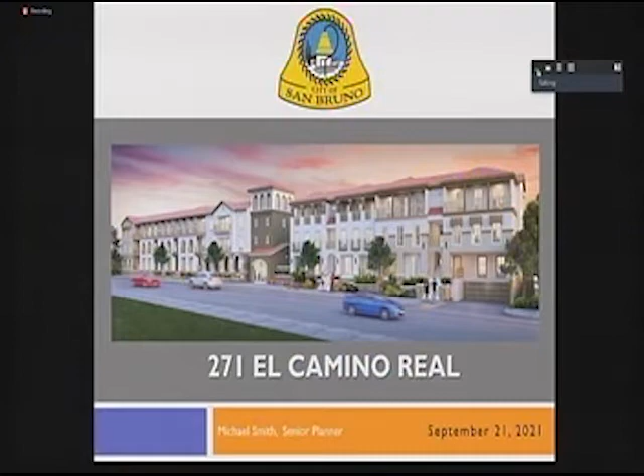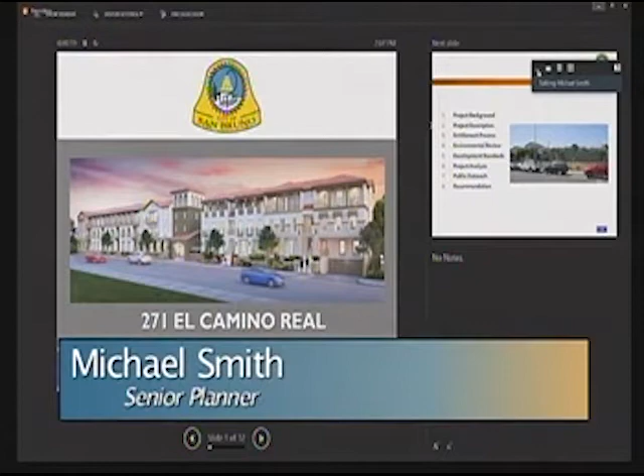The project before you is 271 El Camino Real, located on the west side between Crystal Springs Road and San Felipe Avenue. The site is approximately 0.57 acres, comprised of 6 contiguous parcels. While most of the project site fronts on El Camino Real, it includes a narrow parcel with frontage on Linden Avenue at the rear to the west. The site is presently vacant and fenced off, formerly occupied by a restaurant, an attached single-family dwelling, and a surface parking lot, all demolished in 2015. There are 10 mature trees, including 5 heritage trees, and a number of shrubs present. Surrounding land uses include single-family and multifamily residential in all directions, and various commercial businesses along El Camino Real.

The project site has a general plan land use designation of multi-use with a residential focus and is zoned MXR, multi-use with a residential focus. Please note this is part of the rezoning efforts from April of this year.

So that's a little bit of the project background. I'm going to go into the project description, cover the entitlement process, touch on the environmental review, the development standards for the site, give you a project analysis, cover the public outreach that was done, and wrap up with the staff recommendation.

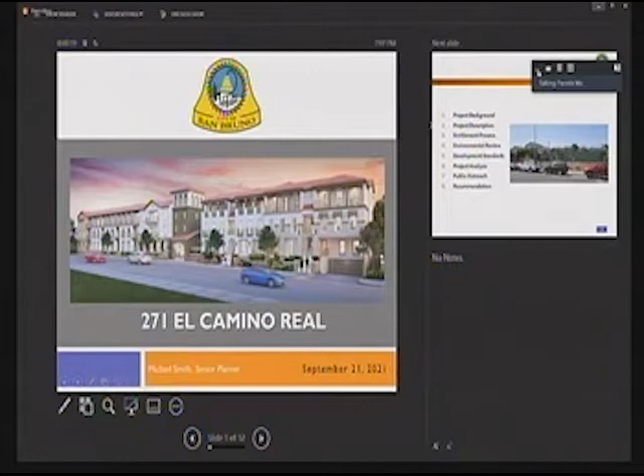Michael, can I pause you? We're not seeing your slide moving, you're still on the cover slide, and there are actually 32 slides. You may have to reshare your screen. I'm going to forego that for right now since I've spoken with the project architect and he's done a really good slideshow of the project. I'm having trouble toggling back and forth between the two and the staff report, so I'm just going to stick to the presentation portion.

So where I left off, the height of the building is 48 feet 2 inches, with apartments on the southern section and townhouses on the northern section. There's approximately 4,955 square feet of common lobby space within the complex, including all the walkways. In total there will be 13 two-bedroom units and 10 three-bedroom units, for a total of 23 units. Vehicle access would be provided via a new right turn in and right turn out driveway on El Camino Real at the northern corner of the project site.

The driveway would connect to a 50 space below grade parking garage of approximately 17,752 square feet, providing 4 guest spaces and 46 residential spaces, including 2 electrical vehicle spaces, 3 ADA spaces, and 1 motorcycle parking space. The garage would be equipped with 12 car lifts handling 24 parking spaces. 6 short-term bicycle parking spaces would be provided adjacent to the ground floor lobby, and 6 long-term spaces in the subsurface garage.

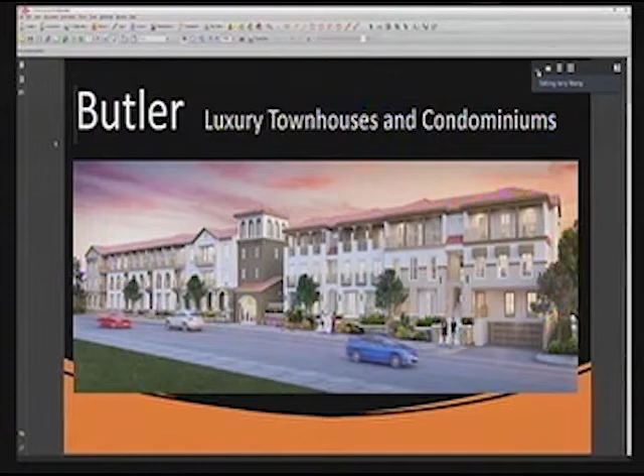I want to show you a little bit about the project history. The project started back in 2015, where there was a vacant lot. The property is relatively flat in topography and has been vacant for a period of time. The project will not displace any tenants or occupants—it's a vacant lot.

Since 2015, Michael has always been next to us, guiding us through this design process. But during this process we had quite a few changes, including zoning changes, director changes, and planner changes. So if you see the screen, these are a few samples showing how the building design evolved architecturally.

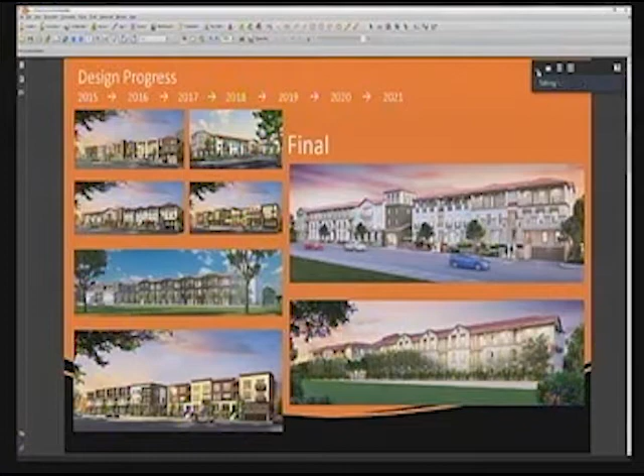So the lake that Michael was referring to is really the green open space. As of right now, we are planning for this to be gated. However, the applicants and owners are open to the idea that this could be open to the public if that's something the commissioner would consider. The applicant is open to the idea.

The project consists of 4 parts. The north, on the right-hand side, the blue portion, is 8 townhouses. I know that's a little confusing, I'll have a section to show you a bit later. So there are 8 townhouses on the right-hand side. In the middle is the yellow portion, a courtyard and common area. There's the lake, a green open garden, we call it the green belt. Then there are 15 condos to the left-hand side, the south portion of the project.

Parking was one of the questions raised. We have a total of 50 parking spaces: 26 regular on-grade parkings and 24 mechanical parkings. Commissioner Morgan was asking about these lift parkings. The kind that sinks down to the ground requires a lot more depth for the car to be picked up first and then go up and down. We don't have that kind of luxury in a site like this - we only have about 60 to 80 feet depending on where we are, but this is a very long and narrow site. So we don't have the luxury of attendant mechanical lift parkings. That's probably the only solution we have, so we're proposing 24 mechanical lift parkings, shown in blue. The yellow is the 26 regular parkings, 4 of them are for guests, so we have 1 extra parking space.

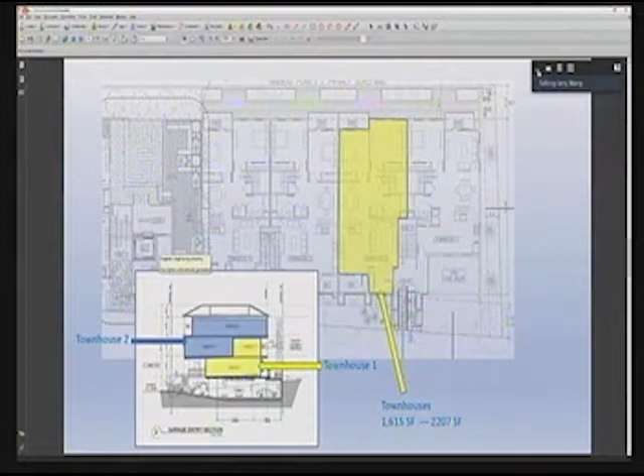To respond to how townhouses work: each townhouse occupies 1.5 levels. If you see the section on the bottom left, the yellow is 1 townhouse unit, the blue is another one. The yellow unit's entrance comes from El Camino Real, with stairs coming from the sidewalk. However, the upper unit, the blue section, has stairs going to a 2nd floor - they enter from the 2nd floor, so their front door and main entrance are actually on the 2nd floor. That's how the townhouse works, split across 1.5 levels on the 2nd floor.

So the apartments - again, those are all condos, I might have confused you, I'm sorry. We call it townhouse just to distinguish different styles of design, but they are all condos. On the left-hand side, the southern portion, it's a more typical condo - they are flat, ranging from 1,000 to 1,560 square feet. They have a balcony, a very decent size balcony throughout.

That's the green section. To go back to Commissioner Herman's comments, we propose a very earth tone, water conservative, water friendly plant selection throughout the project. Although open space is not a requirement, we feel it's an important element to provide green and open space to breathe in the urban setting. This site is heavily vegetated, and we propose different types of trees, landscape and hardscape.

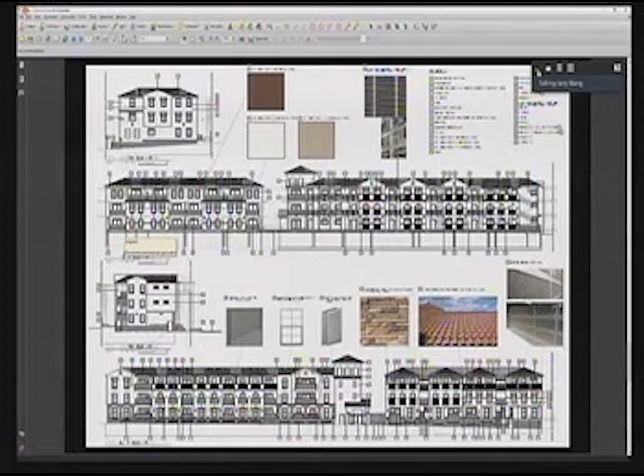Michael touched upon materials a little bit - the color and material selections are earth tone oriented. We'd like the project to blend in with the adjacent context. We're proposing high quality stone veneers, ceramic roof tiles, windows, louvers, and screens. Affordable housing - Michael touched on this too - we are proposing 3 affordable housing units according to the Housing Inclusionary Act. However, we are not asking for any concessions in this project. All the design met zoning standards, including building heights, setback, and parking requirements. No waivers and no concessions from density bonus law are requested on this project.

Dear commissioners, it's been a long and somewhat struggling process since 2015, so we sincerely ask your consideration to approve this project. I hope I've answered most of the questions, and I'm open to any questions if there are any.

Thank you very much, that was a nice presentation. Thank you. Commissioners, do we have any questions for the applicant?

Through the chair - oh, I'm sorry. I think Commissioner Lathan's hand was up first. It's okay, go ahead, you might ask my question. How do you know?

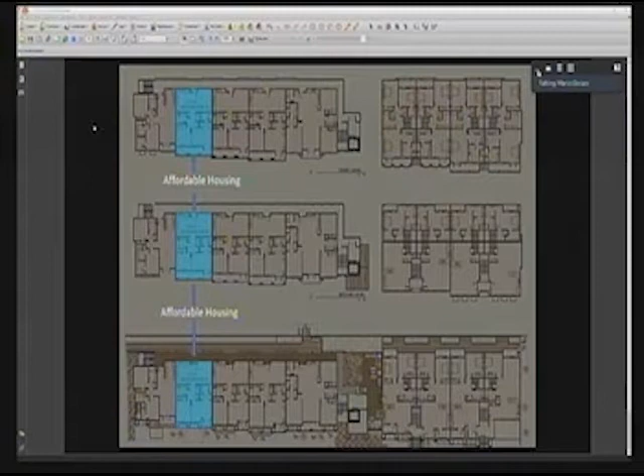Question, Mr. Wang. I saw that 50 parking spaces were provided, 49 were required. How many guest parking spaces would be available for folks who come to visit? I'm echoing a comment that came through email or correspondence with the city, considering how this might impact parking on the street if there's only 1 guest parking space. I know from the staff report and pictures there are businesses up and down the street. Is there any plan for how that overflow might impact folks on the street?

Larry, you're muted. Mr. Wang, you're muted. Okay, sorry about that.

Yes, that's a consideration. We have 23 apartment units here, so we are leaving 1 extra parking space which can be used as guest parking. We're also thinking about having a small green belt, a lane from the neighbors, that could be an access point so guests can utilize not just El Camino, but park on the west portion of the project where there are a lot more parking spaces available. That's a gated community that can be opened through a button, so they can open that gate if the guest is coming from the west portion of the project and enter from the garden as well.

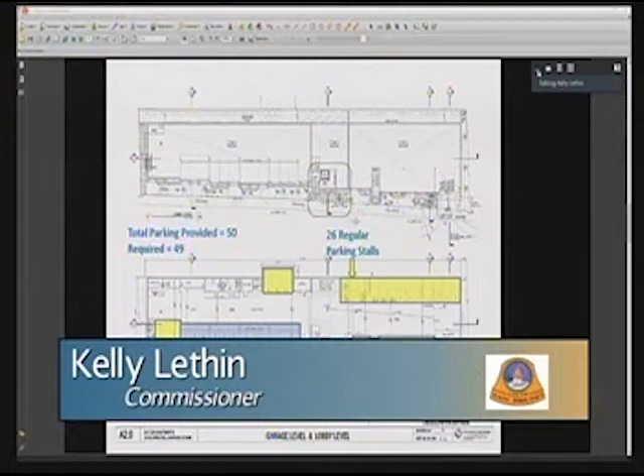The vibration monitoring plan. I've heard in other public comment that on other projects, neighboring property owners have discovered cracking and damage to their homes from high intensity vibration associated with construction. That got me thinking about this vibration mitigation plan, and I thought that was very interesting. I'm certain the adjacent property owners would be interested in participating. I was curious what that would look like for property owners so they can have their property evaluated. I understand it was a 25-foot distance from the construction, but I was wondering how that monitoring plan could be accessed.

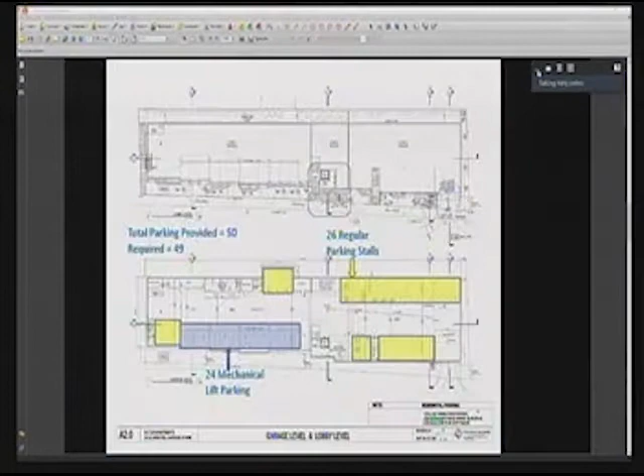Commissioner Lethin, if I may, I think that question might be best answered by our environmental consultants. I forgot to mention there's a team of people behind this project. Our environmental consultants are David J. Powers and Associates, and with us tonight we have Matthew Moore and Natalie Noyes, who assisted on the preparation of the environmental document for this project. So what you just read was a mitigation measure that came from their environmental document.

Great, are they going to be available for questions now or later? Sure, Matthew, I see you there. Are you available to answer that question now? Yeah, you're muted or something. Still can't hear you. Is that better? That is better. Okay, good, sorry about that.

Sure, so the construction vibration monitoring plan does state that there will be a person responsible for registering and investigating claims of excessive vibration, and the contact information of that designee will be clearly posted on the construction site. My understanding is that residents will be provided with that contact information via the posting on site, and will be able to contact the designee and request investigation for any such vibration issues.

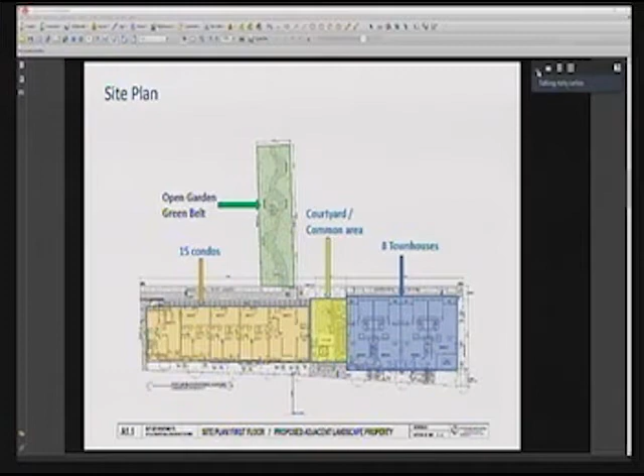Okay, the last one is the bamboo, and I'm really pleased that we're looking at some natural solutions to providing a visual buffer between the single family homes on Linden and this taller building. I think that's wonderful. My one concern is bamboo can be highly invasive, and I was looking up some of the species noted in the report.

It looked like they were not invasive. Sorry, I have a really big bug flying near me. If I freak out, that's what it is. It's a big bug.

But I just wanted to make sure the bamboo is going to be non-invasive, and whether there might be any agreeable alternatives to bamboo, especially considering it's not really in keeping with the Mediterranean aesthetics. Also, in the section I saw, the area containing that landscaping looked enclosed, with a foundation and a retaining wall around it. But I have concerns, since I have experience with bamboo destroying neighboring foundations, and I just want to make sure that's not a risk here.

Larry, do you want to answer that question? Sure. So they are actually contained in structural concrete containers. There will be root-proofing and waterproofing on this.

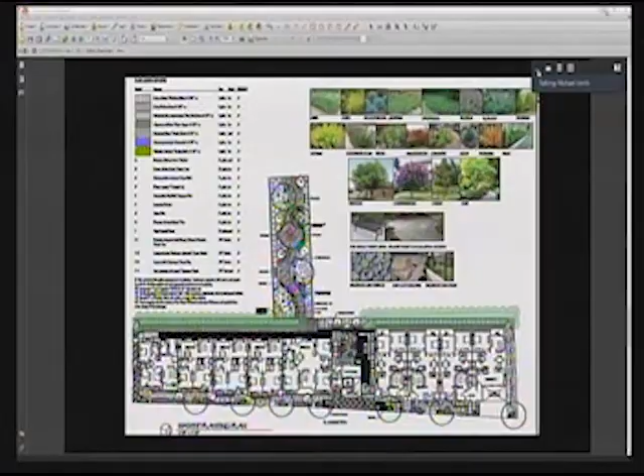And whether or not that space could be used flexibly when not being used for pickup of the cans on garbage day, I think it's something we'll have to work out through the process. I don't see why not, but it's something we're going to have to work out through that TSPC process. Can I clarify?

Do you know if that area is currently parkable? I believe, I think I glanced at Google Street View and there were cars parked in it. Yes, most of that area of the frontage along this property is parkable.

So is the expectation then that we might be looking at everybody putting out their own garbage on their El Camino side of the house, and we've been talking about clearing the entire space for garbage day, or are we expecting to consolidate down to a couple of larger containers that the truck would pull in through a temporary pickup drop-off area?

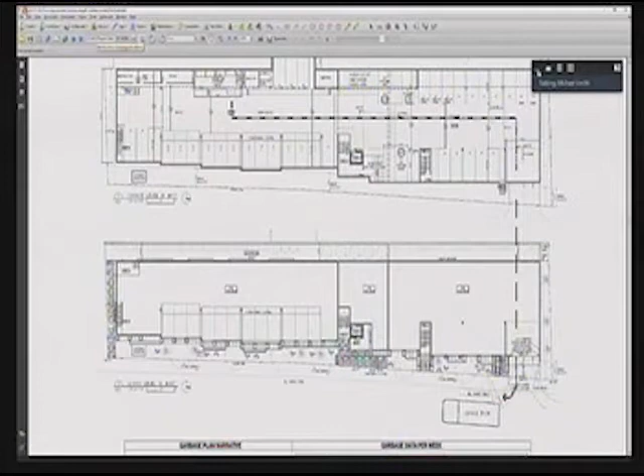These would be the larger containers that the trucks would pull in for, for a larger pickup drop-off area. They would not be the small toters that you see, the residential toters. The issue we had to work through was that this is a basement, and Recology will not do back service to a basement and push those large cans up a driveway, so the building operator or manager has to do that on garbage days.

But how do you time that with making sure they don't spend any time out in the right of way? So we're still trying to work through that, and that's why we're looking at potentially a space to put them at. A dedicated garbage elevator. Yeah.

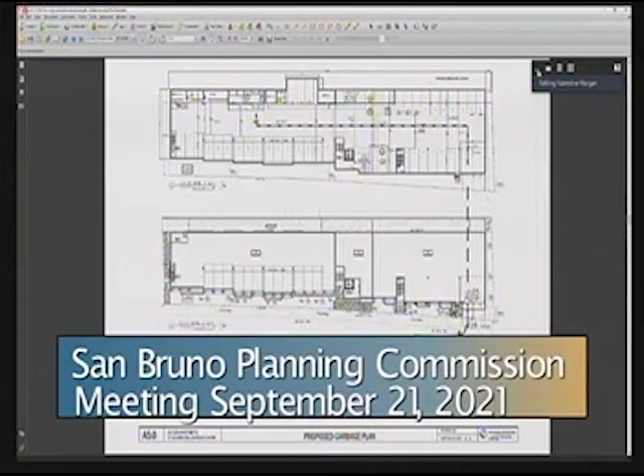All right, Mr. Morgan. Yeah, last question, well for me anyway. Talking about vibration, we're not going down very deep with the excavations, are we? It looks like it's only going to be about maybe 8 feet below grade in the front and maybe 10 feet below grade at the back, something like that. That's correct.

Right, okay, and one last question, just out of interest. When you talk about monitoring maybe cracks in existing buildings for subsidence, do we still use a glass strip over the cracks?

Larry, that's definitely a building code question, so I won't be able to answer that, but potentially Larry will. Sorry, can you repeat that question one more time?

Yeah, if there are existing cracks in the stucco in the existing buildings at the back, and you want to monitor those, do you still use a glass strip over the crack that breaks if there's any subsidence? So usually the document is by photos. So they will do a photo survey first.

Okay, so again, a consultant will be hired at this point at the building construction document stage. A photo survey first, which takes all the pictures, and then there will be an elevation survey, which marks on the building elevations.

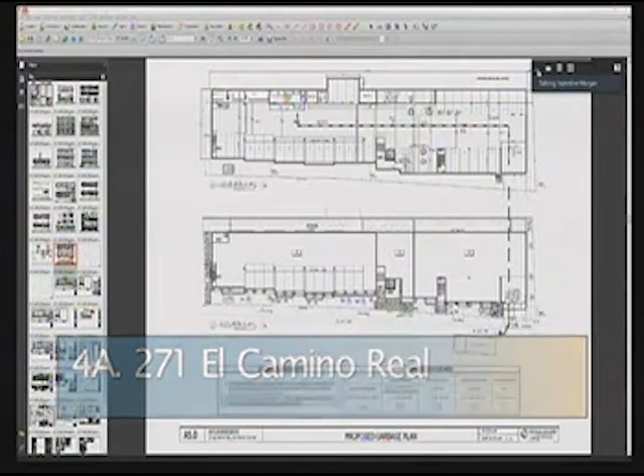Oh, it's just the settlement. Right, yeah, they just mark a line on it. Years ago they used to stick a glass strip across the crack, and if the glass broke, obviously there was subsidence. They used to call them telltales. I see, anyway, that's okay, just going back in history. Okay, thank you very much.

So I want to go back a little bit about that garbage pickup that Michael was mentioning. We have spoken to Recology, and this went back and forth a few times. We did have consent from Recology that the garbage will be temporarily parked on El Camino, once a week basis, just like all the neighbors. Those will be bigger containers, and if you see A5.0 on your package, the truck will not pick it up there, but the truck will park next on El Camino Real and then lift the containers and dump them into the garbage trucks.